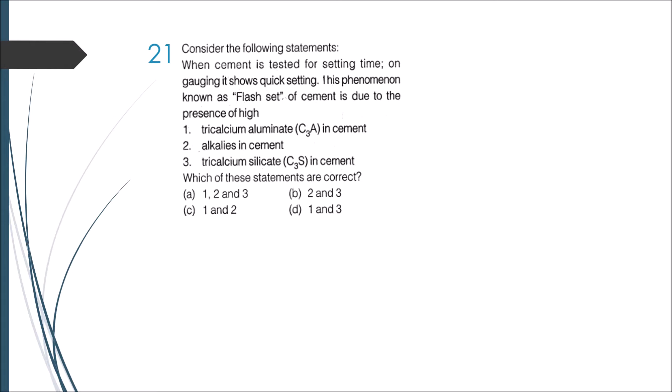Hello everyone, welcome to the third series. So let us start with the 21st question. The question goes like this: when cement is tested for setting time on gauging, it shows quick setting. This phenomenon is known as flash set of cement. It is due to presence of what? The three options given here are two are Bogue's compounds, one is alkali.

So alkalis are not responsible for the flash set. They don't provide any setting or strength properties. Therefore, you can omit number 2 and therefore omit anything with number 2. Your answer is 1 and 3.

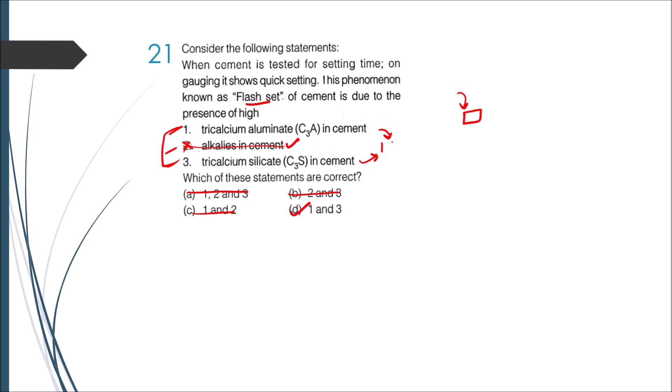If you want to check, if you look at tricalcium aluminate, it is something which reacts firstly in a hydration reaction, and it is also responsible for the setting. And tricalcium silicate, this is also responsible for the early setting. So these two things, they react firstly when water is added to the cement. So therefore your answer is 1 and 3.

Next, which of the following statements regarding cement fineness is not correct? Fine cement is more liable to suffer from shrinkage cracking than coarse cement. This is correct. Fine cement will show faster rate of hardening than coarse cement. This is also correct because they are very fine and therefore the surface area is very large. It will react very fast. And fine cement shows faster rate of heat evolution, and total quantity of heat evolved is much larger than coarse cement. This is also correct.

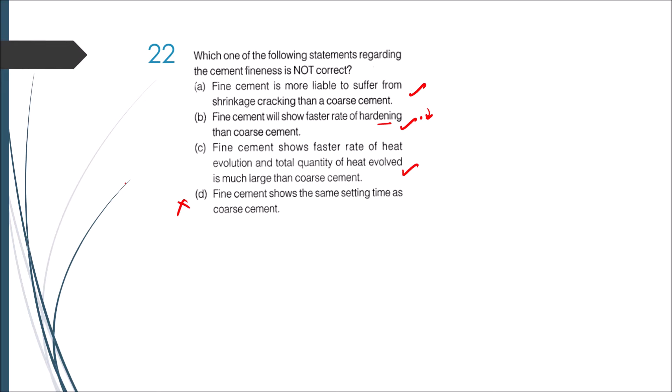Fine cement shows same setting time as coarse cement. This is wrong because for fine cement, the setting time will be very less because the surface area of cement is more, and therefore hydration reaction will take place very fast. So your answer is option D.

Next, for marine works, the best suited cement is what? So for marine works, we will mostly go for Pozzolana cements. Pozzolanas are non-cementitious materials like fly ash, rice husk ash, or GGBS, which is ground granulated blast furnace slag, or blast furnace slag simply. So your answer is blast furnace slag.

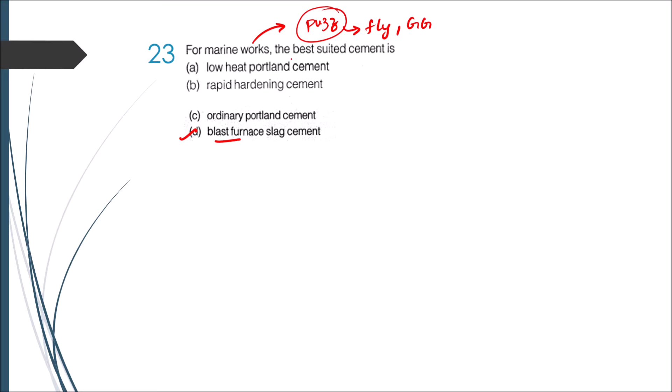The reason why we are going for pozzolana based cement is because marine works will have many chemicals in them. There will be presence of salts, chlorides, sulfates, etc. So in order to combat these things and to avoid chemical reactions, we will go for pozzolanic cements.

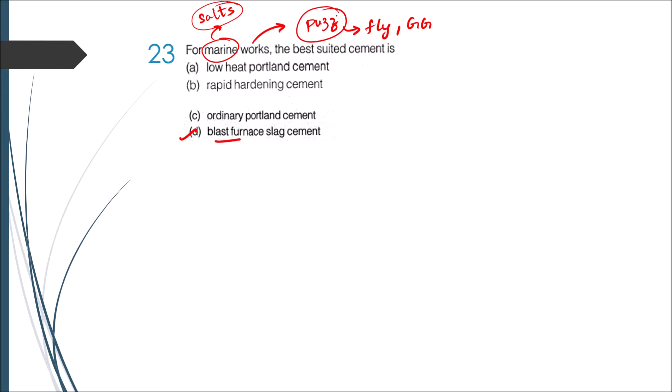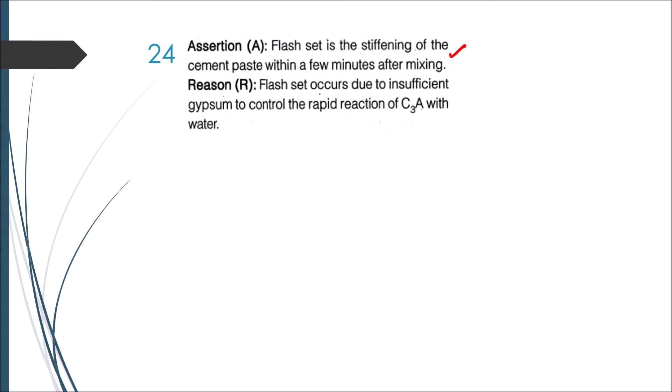So the upcoming few questions, this will be the format. Statement 1 and 2 will be given. We have to choose either of these four things. Flash set is the stiffening of cement paste within few minutes of mixing. This is true. And flash set occurs due to insufficient gypsum to control the rapid reaction of C3A with water. This is also correct. Because of less gypsum, that is calcium sulfate, the flash setting occurs. So both the things are correct. Your answer is option A.

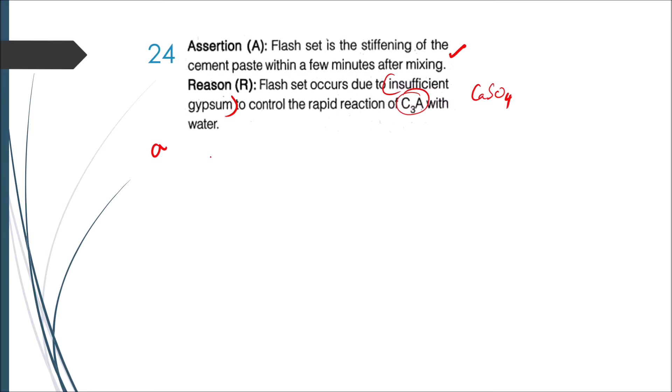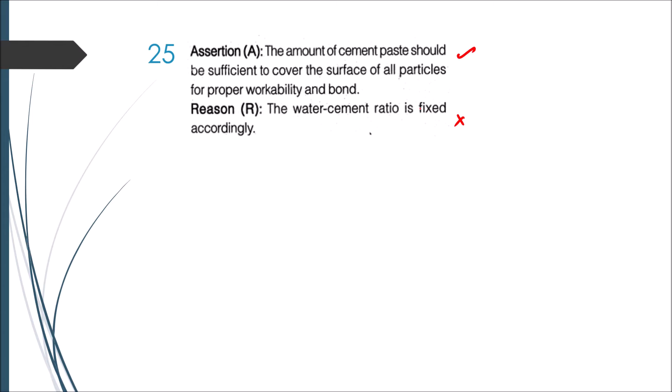Next is the amount of cement paste should be sufficient to cover the surface of all particles for proper workability and bond. This is correct. Water cement ratio is fixed accordingly. This is wrong. So if you have looked at my mix design video, you would have known that for fixing the water cement ratio, you will not look at the amount of cement paste, etc. You will just look at the amount of cement alone. So this is wrong. Your answer will be option B.

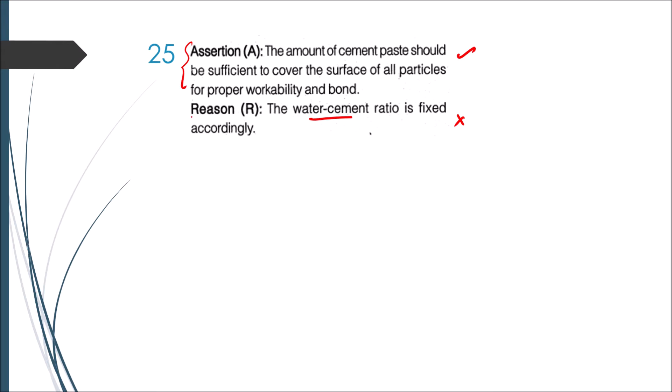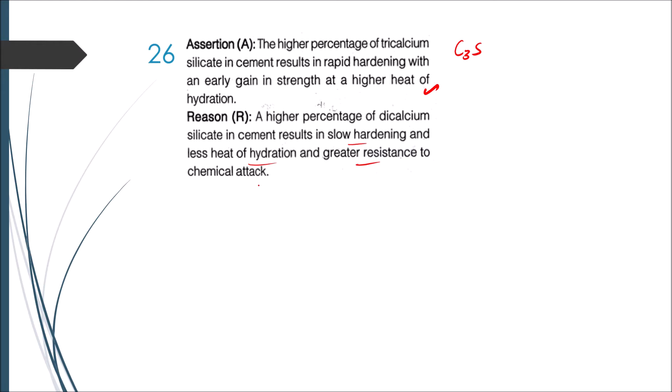Next, higher percentage of tricalcium silicate in cement results in rapid hardening with early gain in strength and higher heat of hydration. This is correct. High percentage of dicalcium silicate results in slow hardening and less heat of hydration and greater resistance to chemical attack. This is also correct. So your answer is option A.

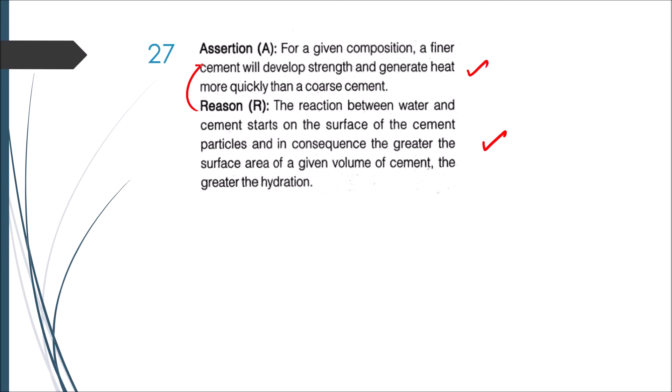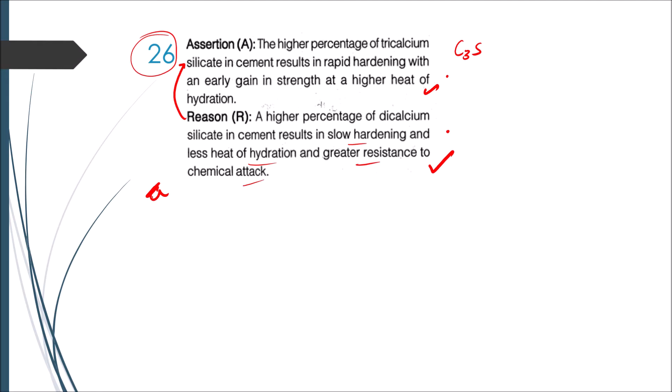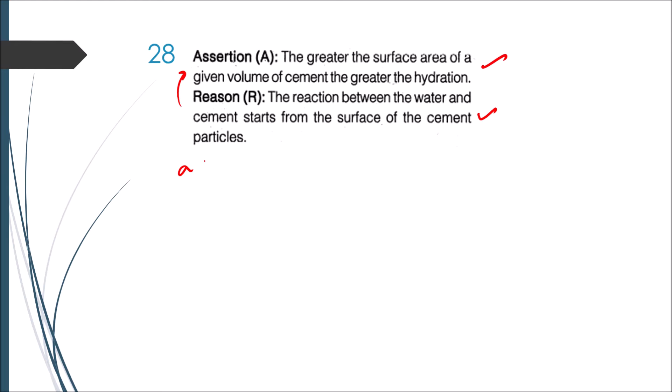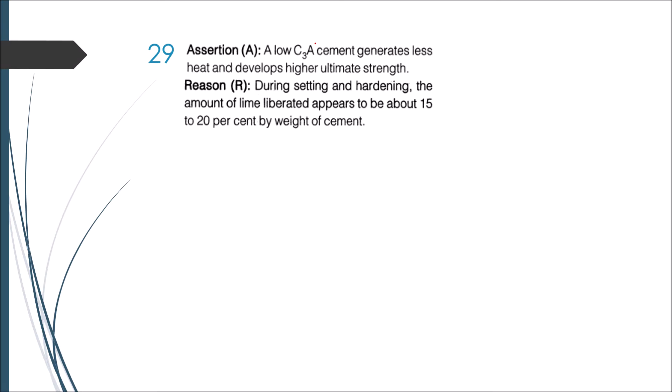Next, a low C3A cement generates less heat and develops high ultimate strength. So C3A is tricalcium aluminate. So it generates less heat, which is correct, and develops a high ultimate strength. That is also correct.

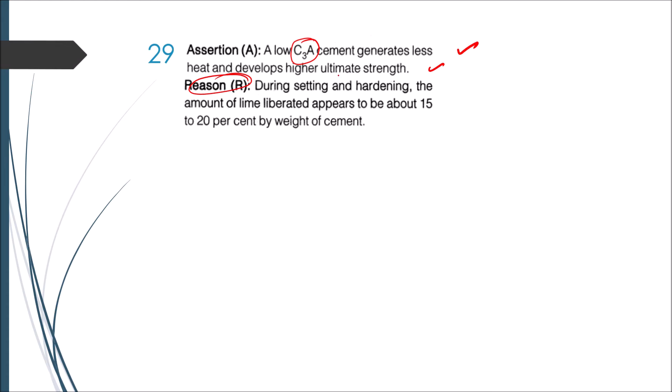During setting and hardening, the amount of lime liberated appears to be about 15 to 20% by weight of cement. The reason given here is very vague, therefore we can select option C, which means A is correct but R is wrong.

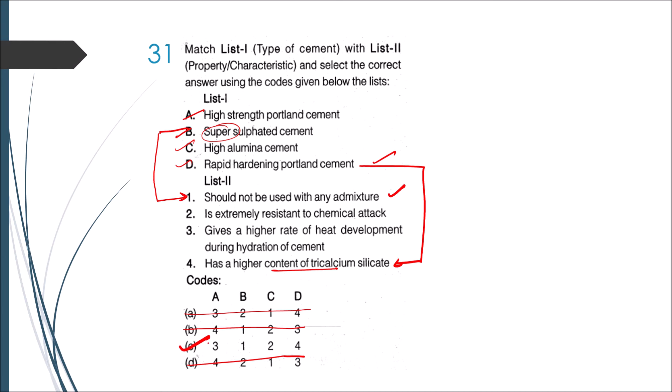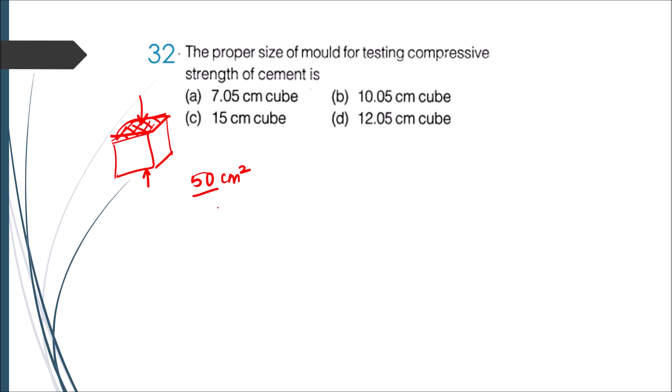That is your requirement. So if the area is going to be 50 centimeter square, then what should be your side? You can just take square root of 50, which will give you 7.05. Therefore, your answer is 7.05 centimeter cube.

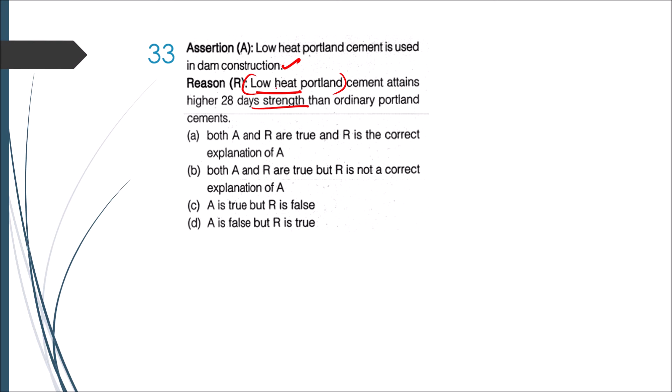Next, low heat Portland cement is used in dam construction. Low heat Portland cement attains higher 28-day strength than ordinary Portland cement. It does not attain high strength. The only reason we use low heat Portland cement is because it generates less amount of heat. So R is false. So the answer is option C.

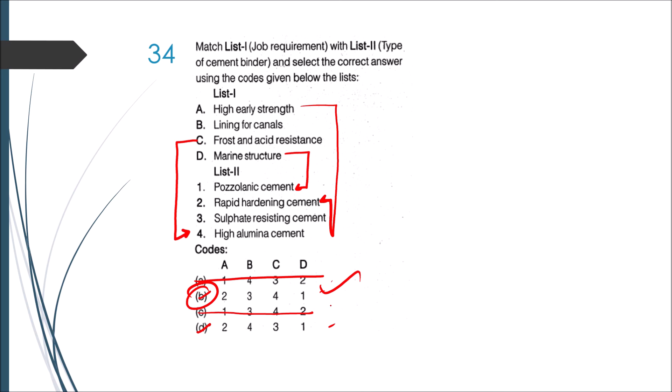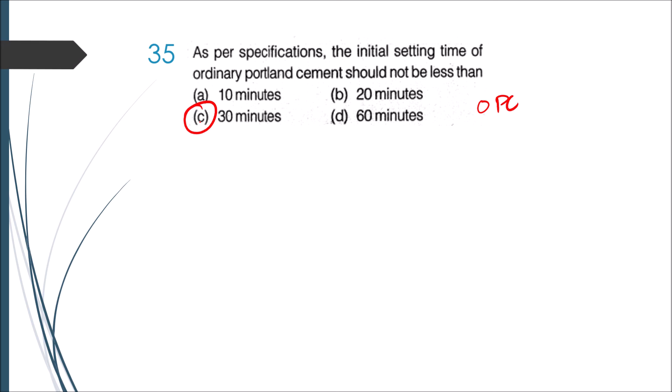Next and the last question of this series. As per specification, the initial setting time of ordinary Portland cement OPC should not be less than what? It should not be less than 30 minutes. And final setting time should not be greater than 10 hours. So with this, we come to the end of this lecture.